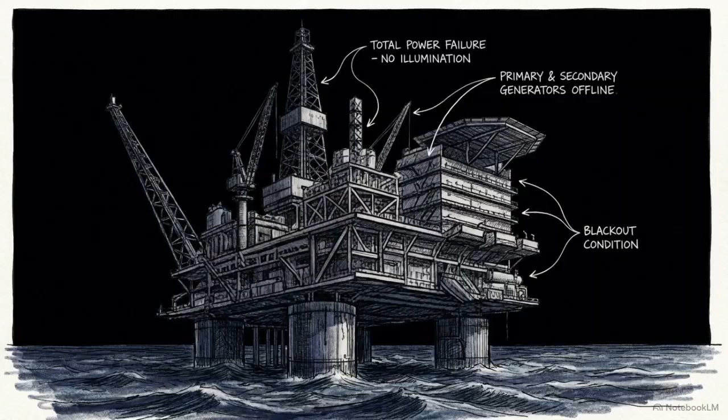Picture an offshore platform at 2 in the morning, hundreds of miles from the nearest coastline, completely cut off from the mainland grid. If the power dies here, everything stops. Production freezes, life support systems fail, and a multi-billion-dollar operation goes dark. The only thing standing between the crew and a total blackout is the prime mover, an aeroderivative gas turbine generator.

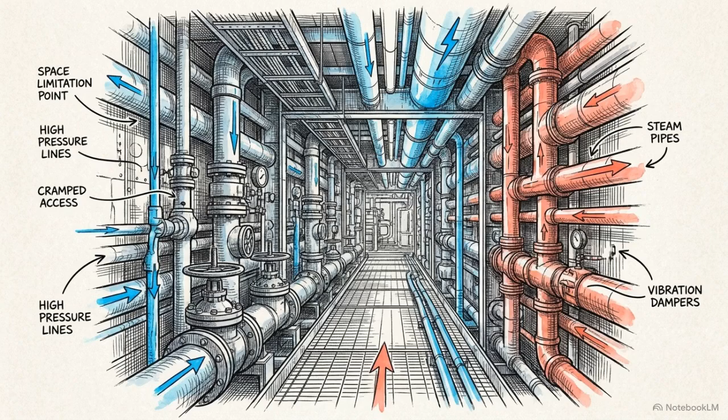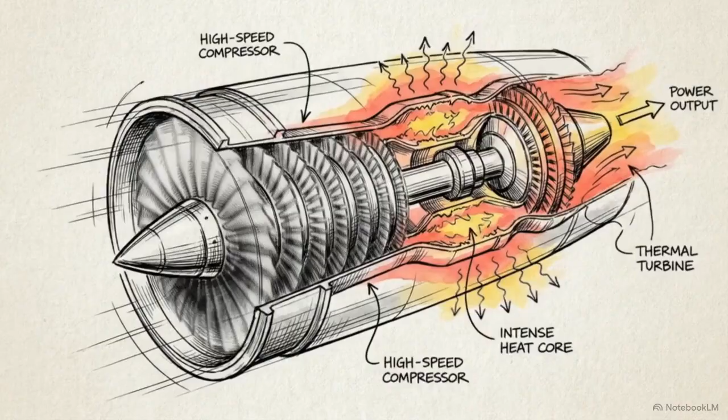Offshore engineering is a constant battle against weight and space limitations. You cannot put massive, heavy-duty industrial power plants on a rig that has to float or stand on steel legs. So engineers use jet engines, modified aircraft turbines, because they offer massive power in a highly compact, lightweight package. But relying on lightweight machinery in one of the most hostile environments on Earth means the platform's power grid is always walking a tightrope. The margin for error is razor thin.

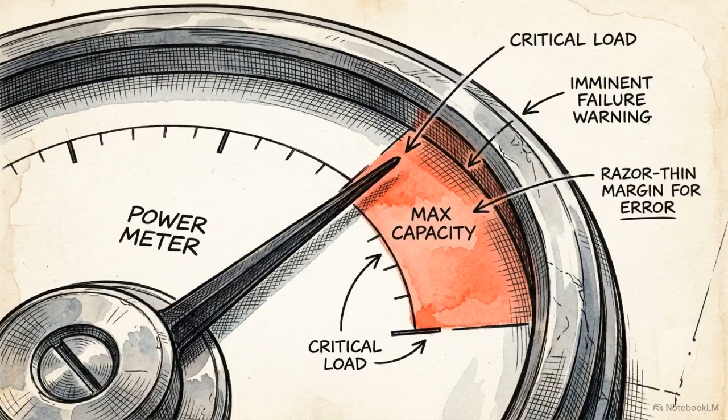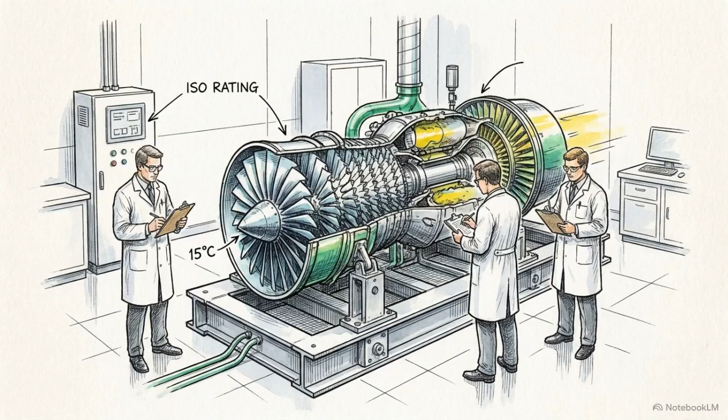To understand why, look at the generator's manual. It might claim a maximum output of 15 megawatts, but that is the ISO rating, which only exists in a laboratory setting at sea level, exactly 15 degrees Celsius, with a perfectly clean engine. This chart shows what actually happens when you put that machine in the real world.

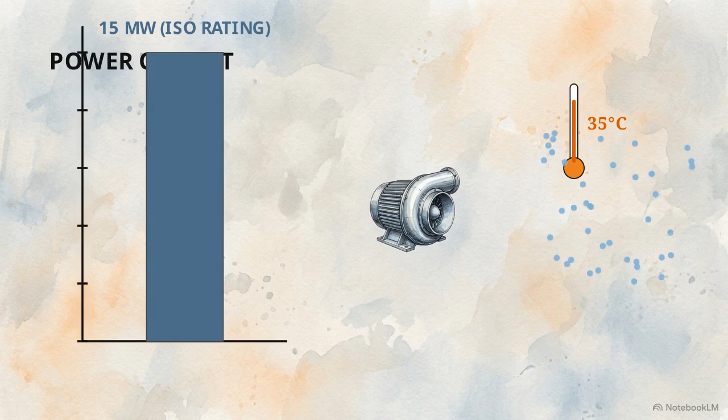Out on the water, the ambient temperature might be 35 degrees. Hot air is less dense, meaning less oxygen enters the compressor, which immediately strips away a huge chunk of the turbine's capacity to generate power.

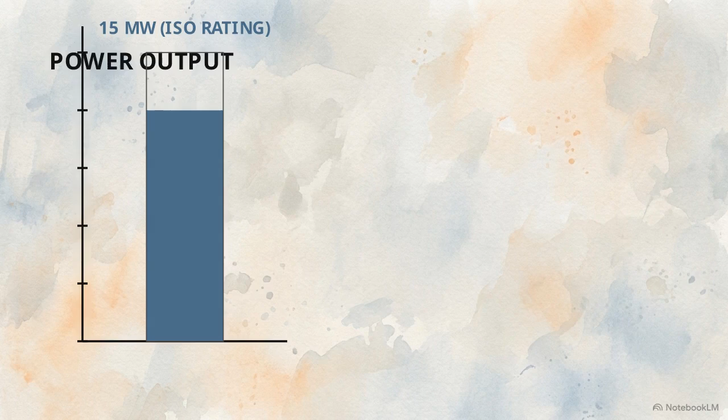Then we have to subtract the parasitic losses. The air intake filters get clogged with salt and dirt. The heavy acoustic silencers on the exhaust restrict airflow. The speed-reducing gearbox adds mechanical friction. Very quickly, that pristine 15-megawatt machine is only capable of delivering 12.

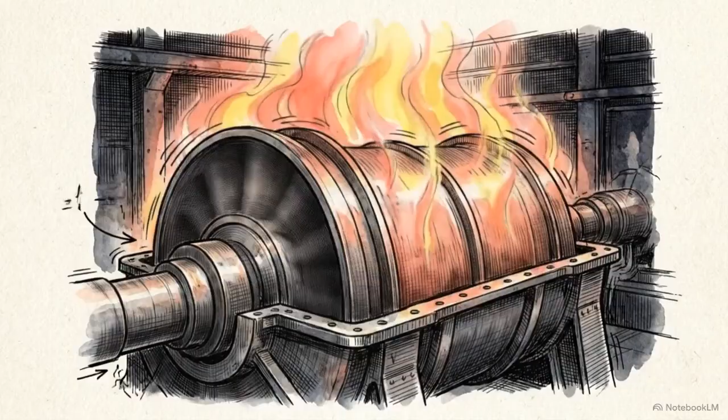Before the crew even turns on a major piece of drilling equipment, the environment has forced the turbine to run hot and work close to its physical limits, just to keep the lights on and the baseline processes running.

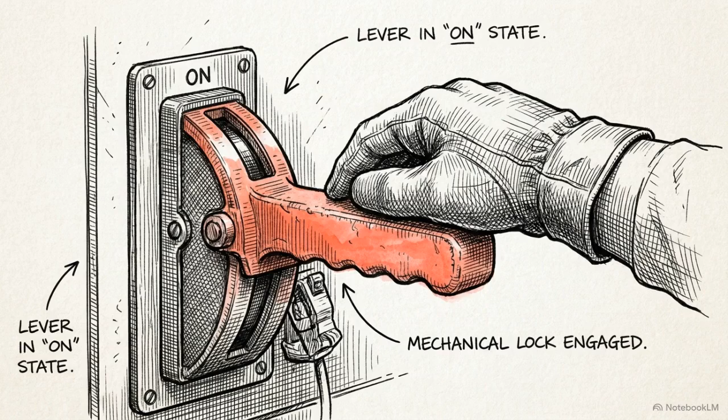Then, the drill floor calls for the heavy machinery. They need to start a massive gas compressor motor, and they do it direct online, meaning they throw the switch and connect it straight to the grid without any gradual ramp-up. A motor of this size pulls an instantaneous, massive spike of current to overcome its own resting friction.

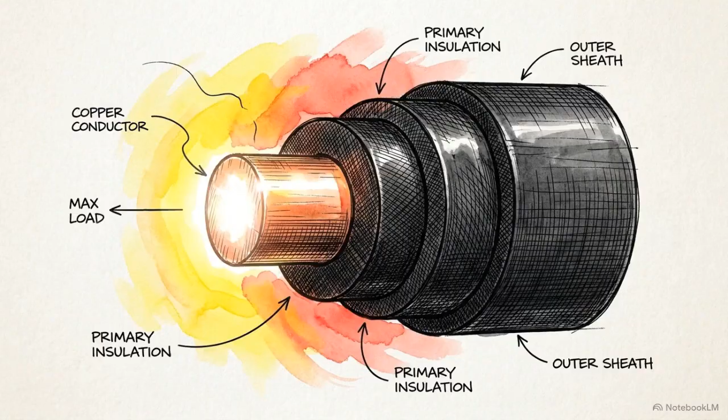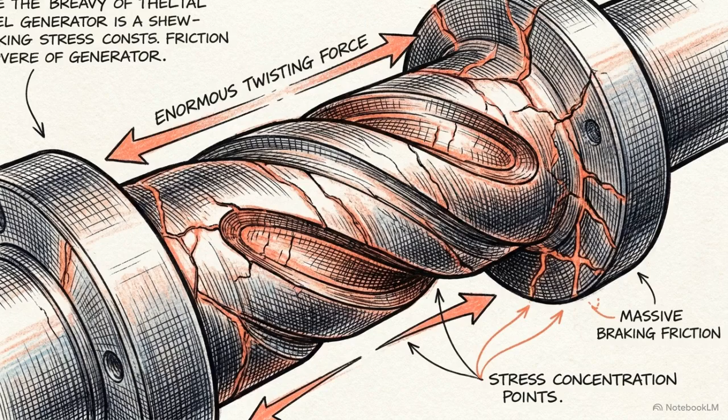Inside the generator, the magnetic field reacts to that current spike by aggressively biting into the spinning rotor. It acts like a massive invisible brake, instantly demanding a huge amount of mechanical torque from the driveshaft. On an isolated platform, a sudden electrical surge creates an immediate mechanical crisis, vibrating through the entire drivetrain of the gas turbine.

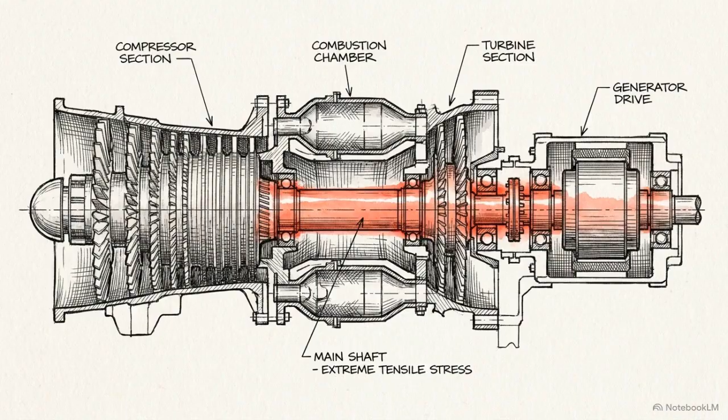In the very first fraction of a second after that motor starts, the turbine's control system hasn't even realized what's happening. The fuel valves haven't moved. The system is in an open-loop freefall.

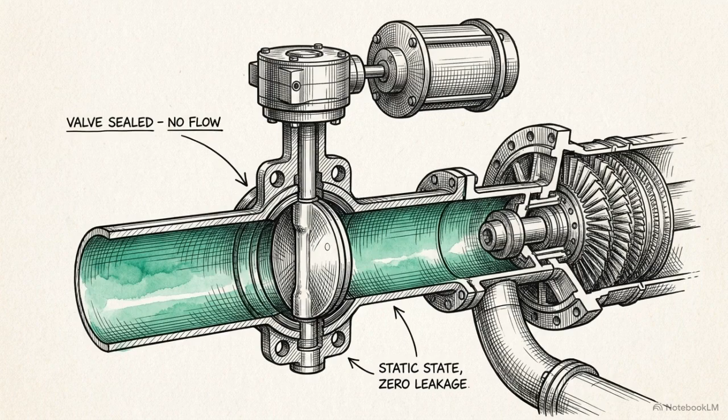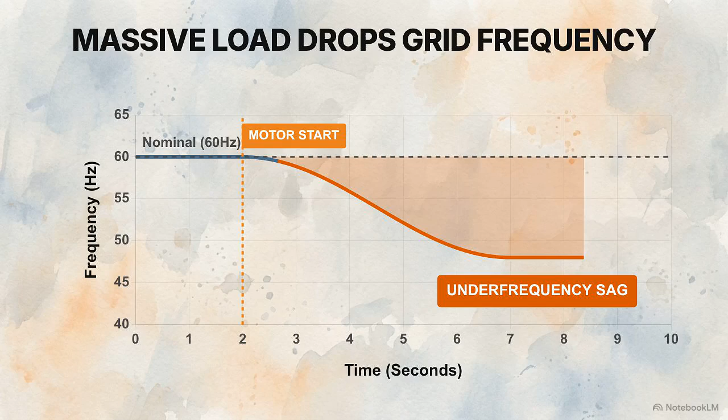Look at this graph showing the electrical frequency. Because fuel hasn't increased, but torque demand has skyrocketed, the turbine shaft slows down. As it sags, the platform's grid frequency plummets. The only thing keeping the engine from stalling right then and there is inertia, the raw physical momentum of heavy steel components already spinning at thousands of revolutions per minute.

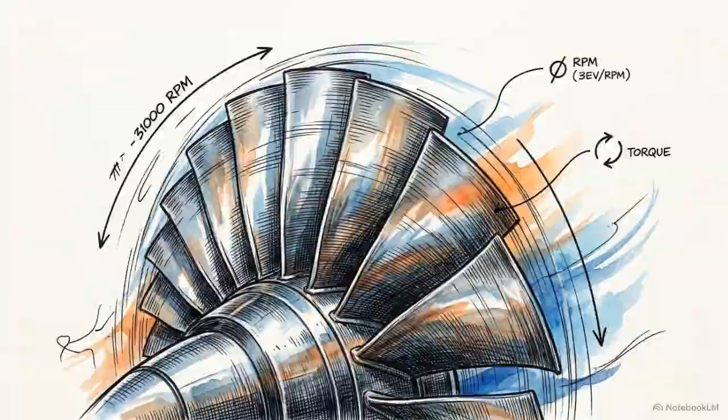Offshore grids prefer single-shaft turbines. Locking the compressor and power turbine together creates a unified rotating mass, which fights the sudden speed drop. But inertia only buys milliseconds. Momentum bleeds fast. The machine must actively fight back, or the grid dies.

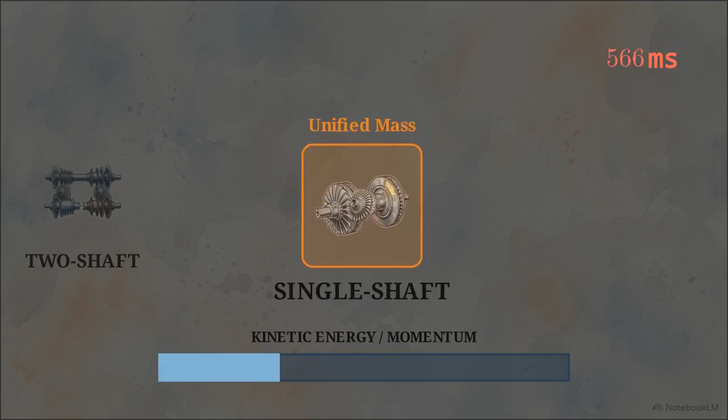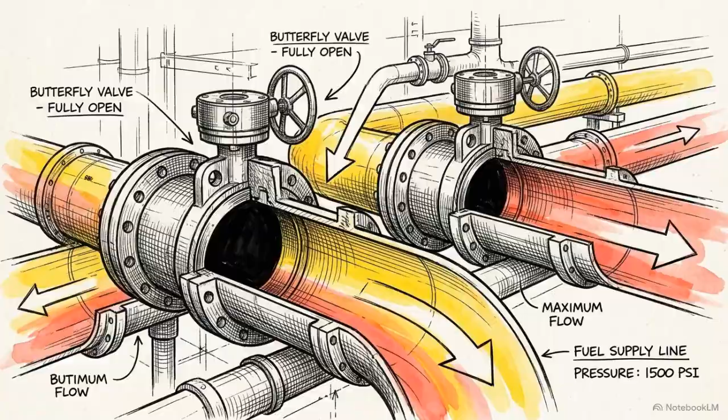This is when the closed-loop speed governor finally wakes up. It detects the plummeting frequency and violently commands the fuel valves to swing wide open. A huge surge of combustible gas is dumped directly into the firing chamber, desperately trying to accelerate the shaft back up to its synchronous speed.

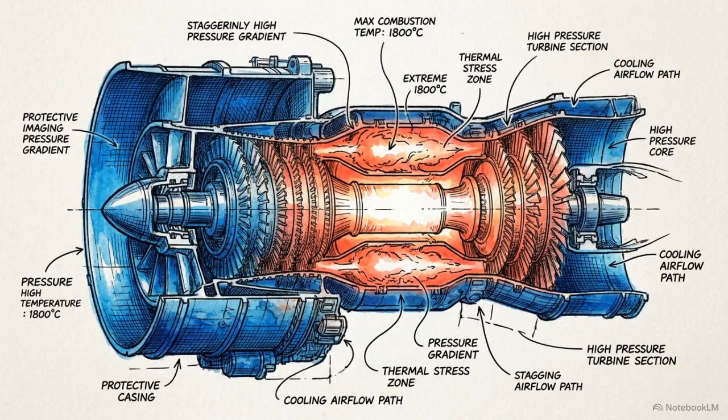But thermodynamics demands a toll. Generating that much immediate mechanical torque also generates a staggering amount of internal heat. This dual-axis chart tracks frequency and internal temperature. Because ambient air is hot and engine filters are choked, that sudden fuel surge acts like a blowtorch. The internal temperature spikes dangerously close to the metal's physical melting point.

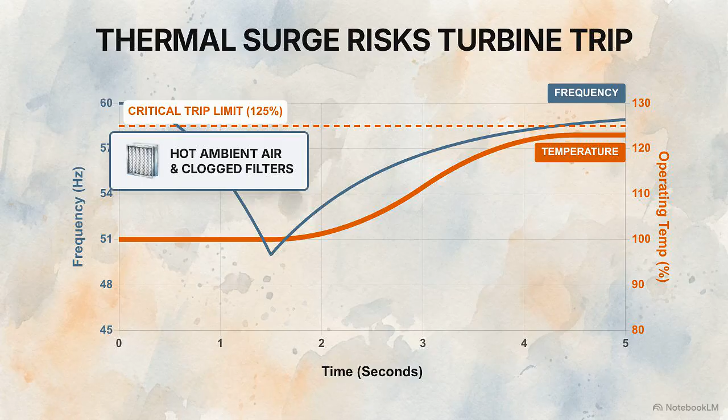If the temperature crosses that upper trip limit, the turbine's self-preservation logic kicks in. It will instantly shut the machine down to stop the blades from melting, plunging the entire rig into a cold, dark blackout. To prevent that catastrophe, the platform relies on an automated brain, the power management system.

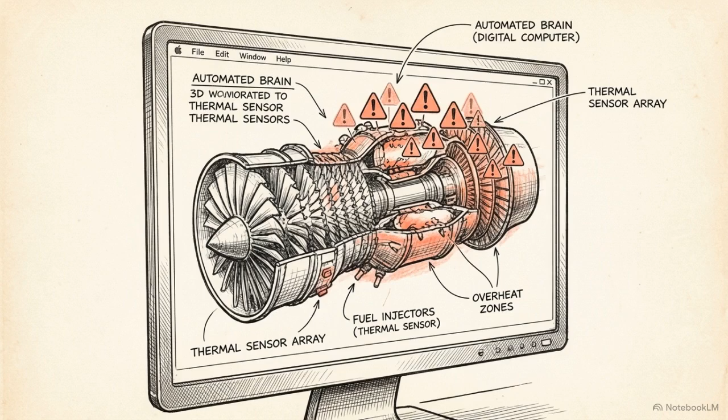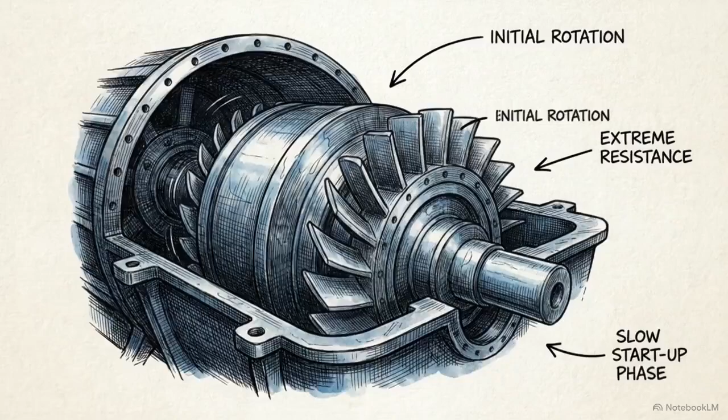It continuously watches the electrical terminals and the turbine's internal thermal sensors. In a fraction of a second, the system calculates the rising heat trajectory. It realizes the turbine is going to hit that temperature limit long before the massive gas compressor finishes its grueling startup phase. So, the computer triggers the platform's automated survival reflex, a process called load shedding.

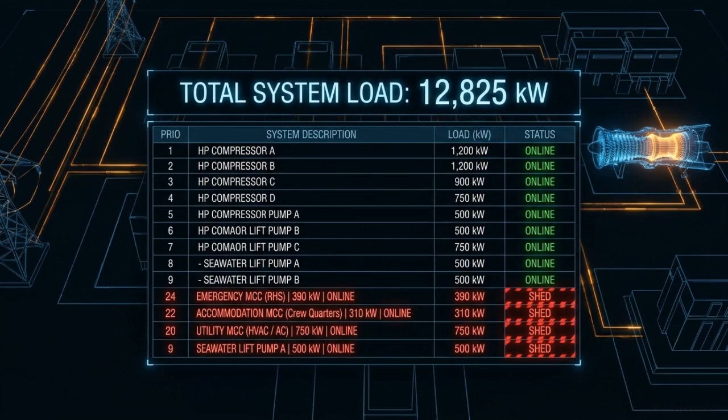The system instantly executes a strict pre-programmed priority table. In milliseconds, it severs power to anything that isn't absolutely critical, shutting off the air conditioning, cutting the water injection pumps, and dropping the crew accommodations offline to instantly erase cumulative kilowatt load.

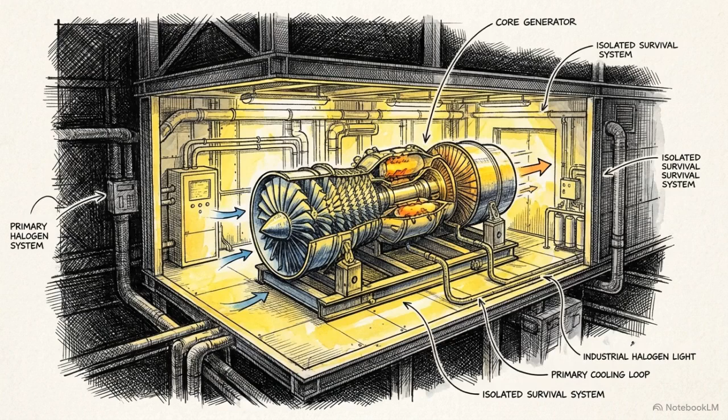Load shedding is a calculated amputation. The computer sacrifices the comfort of the crew and secondary processes entirely, just to ensure the core generator survives the hit.

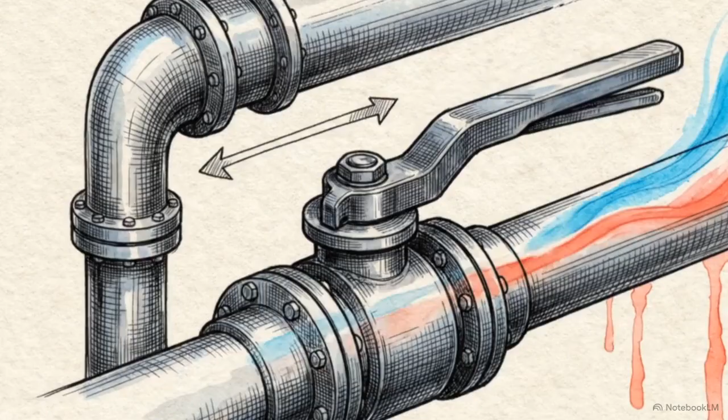And it works. By shedding that extra weight, the total torque demand on the generator drops, the fuel valves pull back, and the internal temperature recedes from the red line, just as the massive compressor motor finally reaches full speed and settles down. Surviving a hit like that isn't luck.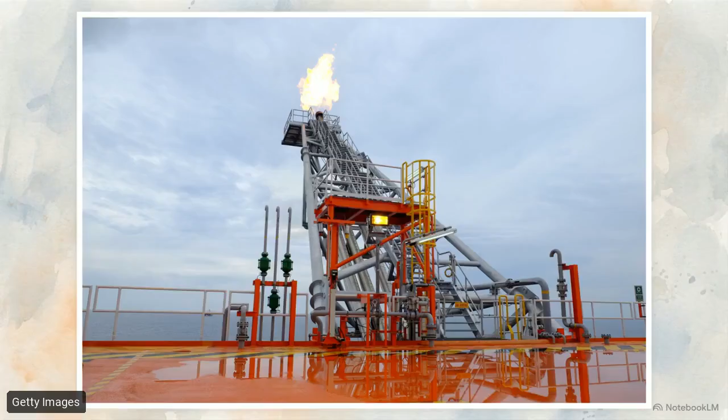It is the result of incredibly precise split-second coordination between electrical load limits, mechanical thermodynamics, and digital control systems. The offshore generator sits at the fragile tail end of a volatile thermal system, a machine that must be meticulously managed to keep the platform alive and the fire burning.